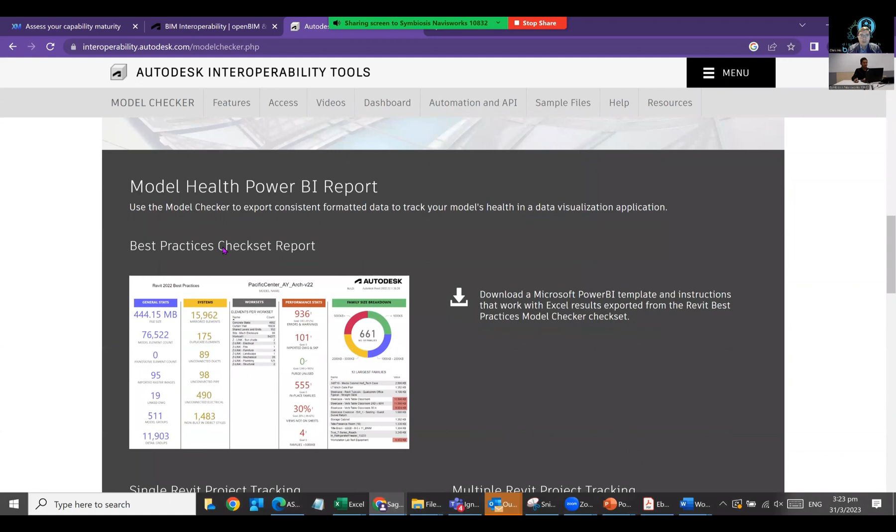Even on our YouTube channel you can look at it, but over here you can download sample XML sheets, Power BI templates that you can use, additional resources such as videos for BIM 360, and the Revit Model Health white paper. You can download these directly from this website, interoperability.autodesk.com. Then we have videos — on top you can see dashboards, automation and API, sample files. You can download some examples, like Penn State model checks, and other model set checks from here, plus helps and resources. All of this can be accessed through this website.

It's great — there are even sample files and PDFs to teach you how to check certain things on your model. Yes, absolutely. I myself came to know about this about 2 to 3 years ago, and we started implementing these quite regularly, and there is no additional cost. This is something people can immediately start acting on to make sure the data is standardized. As we move toward the cloud and common data environments, it's important that BIM acts as the foundation of your digital transformation. If the foundation data is correct and well hygiened, free of errors, then your upstream or downstream applications are more sanitized going forward.

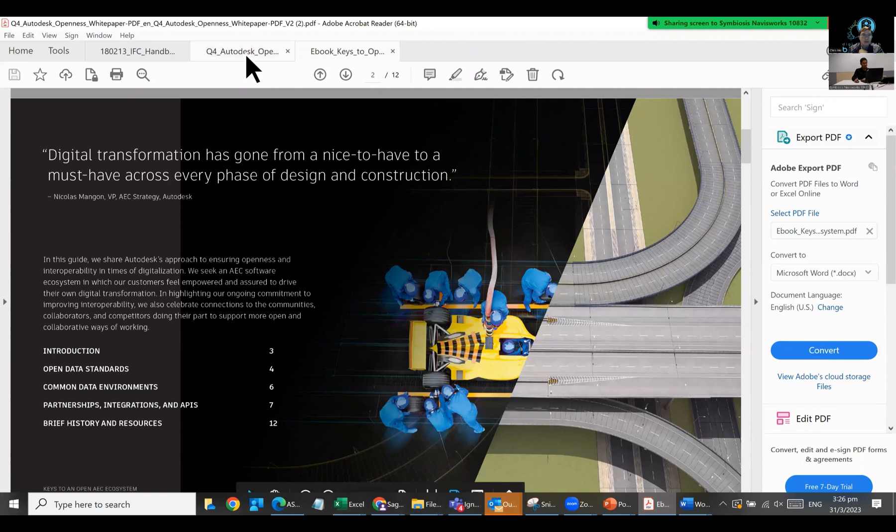Then here, Autodesk and IFC. It's a very interesting story, how IFC began the journey for Autodesk. So for example, if you see today, just sharing this slide with you, Autodesk was the founder of the International Alliance of Interoperability in 1994.

We co-founded it, right? Then in 2002, Revit was acquired, and we began developing the predecessor to IFC. Of course, Building Smart became international and established OpenBIM in 2005. Then Autodesk and Bentley signed the interoperability agreement in 2008. Then in 2010, we added STL exporters in Revit.

Then again in 2011, we opened it up as a toolkit for developers and so on. In 2013, we integrated the IFC standard into Autodesk 360 and BIM 360 cloud solutions. Today we call them Autodesk Construction Clouds, and we added the COBie extension inside Revit. In 2014, IFC 4 was released and integrated in Revit at that time. Going forward to 2021, today we are implementing IFC 4.3 for infrastructure.

So we have always been there, mostly the first ones to integrate and very tightly working with Building Smart. And also now we've joined the Open Design Alliance, by the way. Autodesk joined the Open Design Alliance in 2020. Building Smart is called the home of OpenBIM, and Open Design Alliance is what enables you to offer various SDKs and development tools.

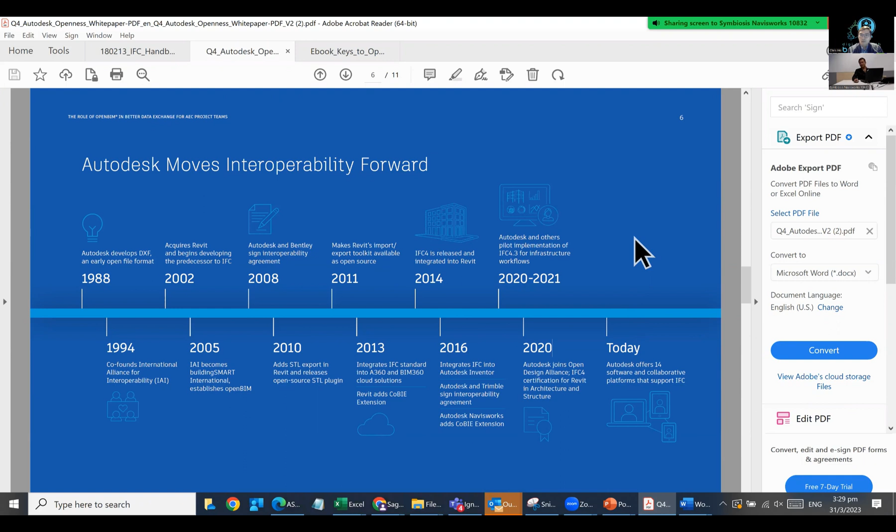And today we have more than 14 software products that have IFC integrated. These include software known by many people, including the Autodesk AutoCAD toolset, Civil 3D, which is our civil application for road and rail infrastructure, then Revit, Robot, Inventor, InfraWorks, Navisworks. All of these today support IFC.

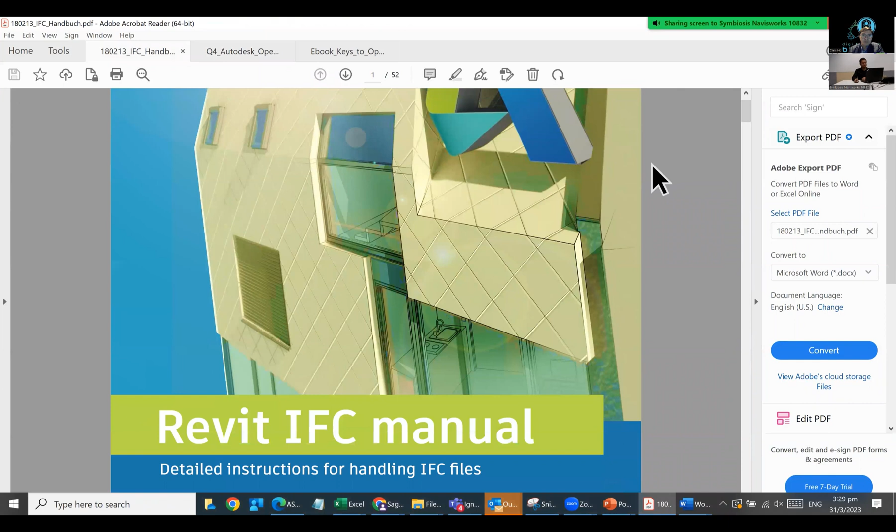So that is something where people can find information. And there is a handbook which we release almost every year, called the Revit IFC Manual. The Revit IFC Manual is quite a popular download amongst Revit users. It has detailed instructions of handling IFC files.

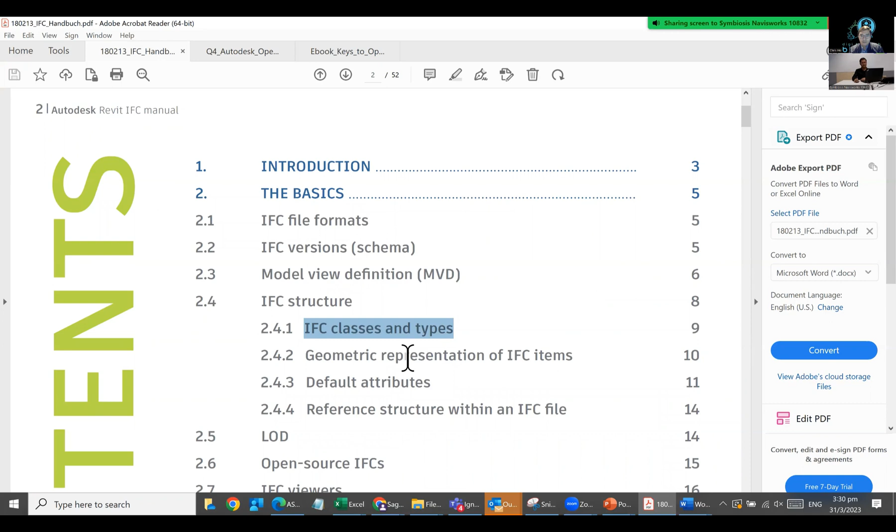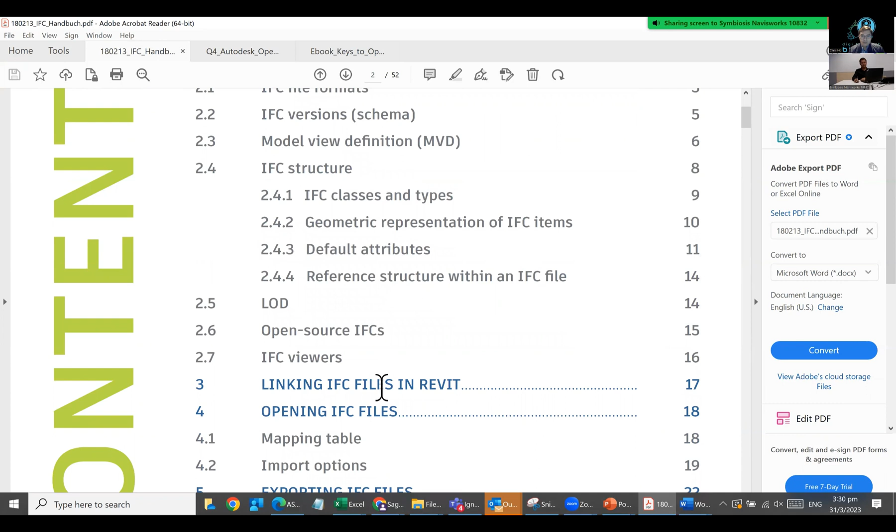So for example, we can look here. It gives you an understanding of what IFC is, IFC versions and schemas, model view definitions, IFC structure, IFC classes and types, geometric representation of IFC items, level of detail information, open source IFCs, IFC viewers, how to link IFC files in Revit, opening IFC files in Revit, accessing the mapping table, importing options. Everything that you need to know is in this guide.

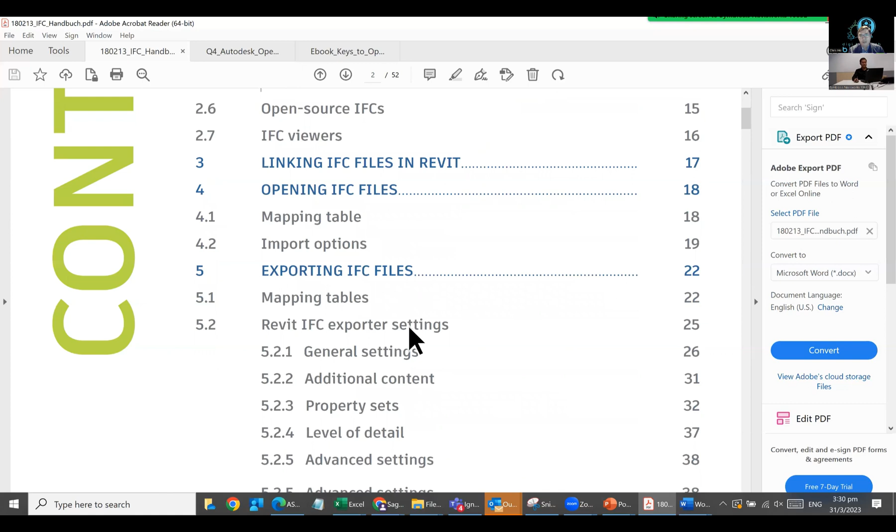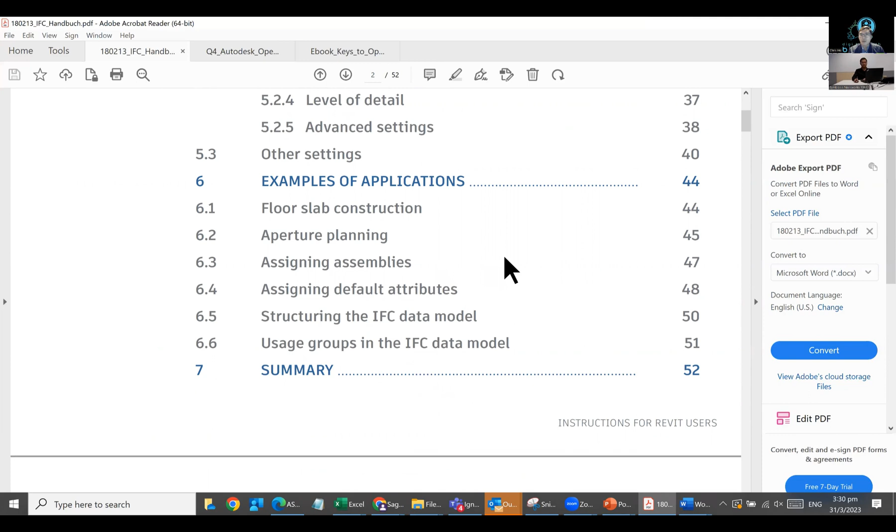All Revit users, roughly around 2 million odd users of Revit worldwide, can access this data, and it's freely available for everybody to use. All of this is very useful information, which I myself have been diving into for the last 6-7 years. There's plenty of IFC literature out there.

So thanks for sharing that with us. I think this will be very useful to anyone listening to this podcast later on, they can just go to the different titles of the ebooks and the PDF. Great resources, thanks for sharing this.

Just a very quick overview, since in terms of using software like Revit, how do you actually export a model onto IFC? Could you just briefly explain a bit on how you do that? Sure, of course. Exporting IFC from Revit is quite straightforward, and it will become even more easier going forward.

I could actually open up the Revit application, but let me just see if that can be done quickly. Okay, but the crucial thing to know is that Revit has been supporting IFC all the way since it was born, utilized by people since 2004, 2006. So the exporter always existed. I'll just share my screen again.

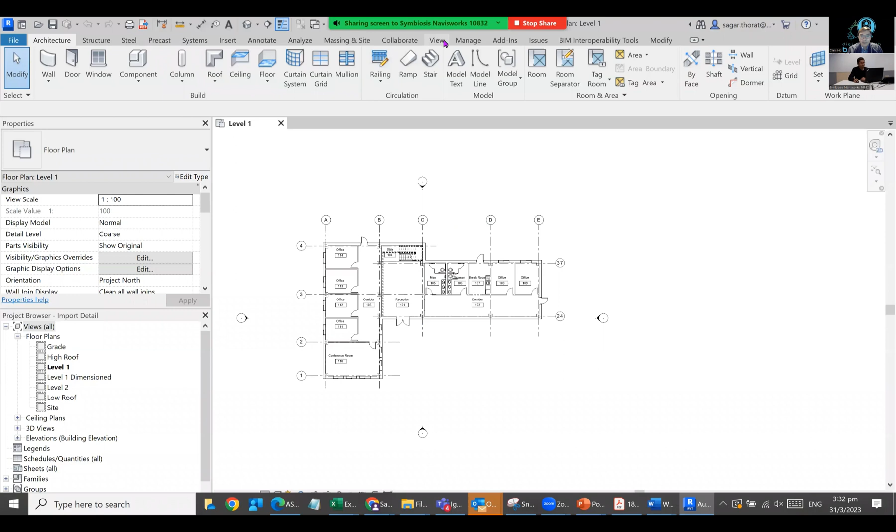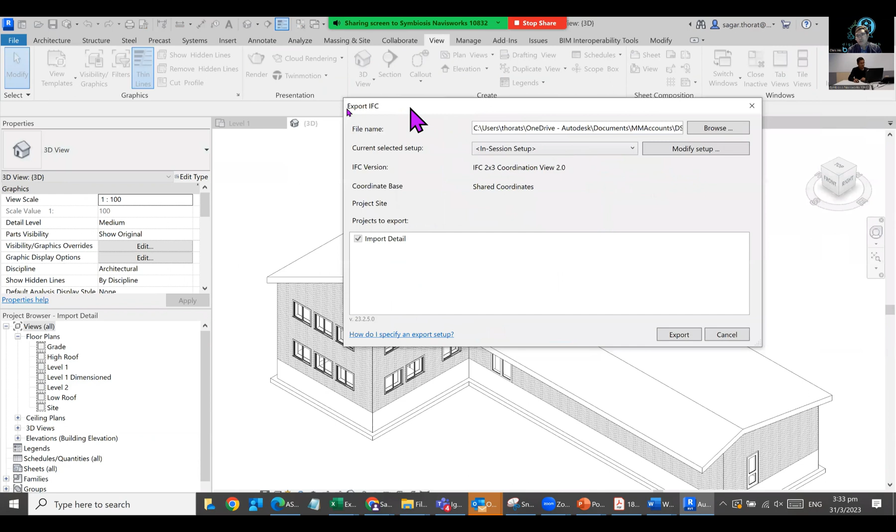Okay, I can see my screen, right? All right, so within Revit, you have this, you can go to File and you just export. So File, Export, and then you have an option here of exporting to IFC. When you export to IFC, the IFC export dialog box opens up. You can choose one of the setups here to export. The first setup to use is IFC 2x3 Coordination View. Then we have 2x3 FM Handover, Coordination View 2x2.

COBie is also a template here. Then IFC 4 reference view, IFC 4 reference view structural - these are the MVD definitions, the different MVDs. Then we have IFC 4 for building services, and the transfer view.

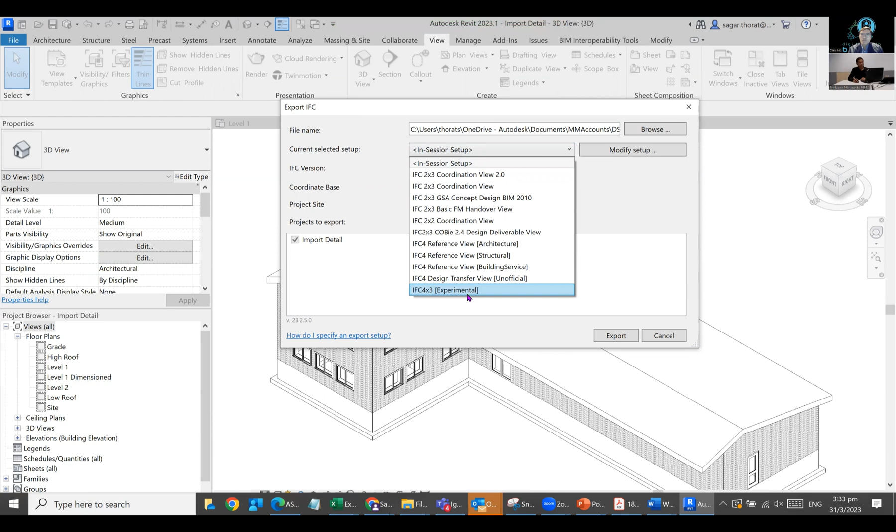And we have already launched, experimentally, an IFC 4.3 for infrastructure in there already. So if I want to do a design transfer view, I can actually modify the setup. People can actually create their own JSON files, their own export setups.

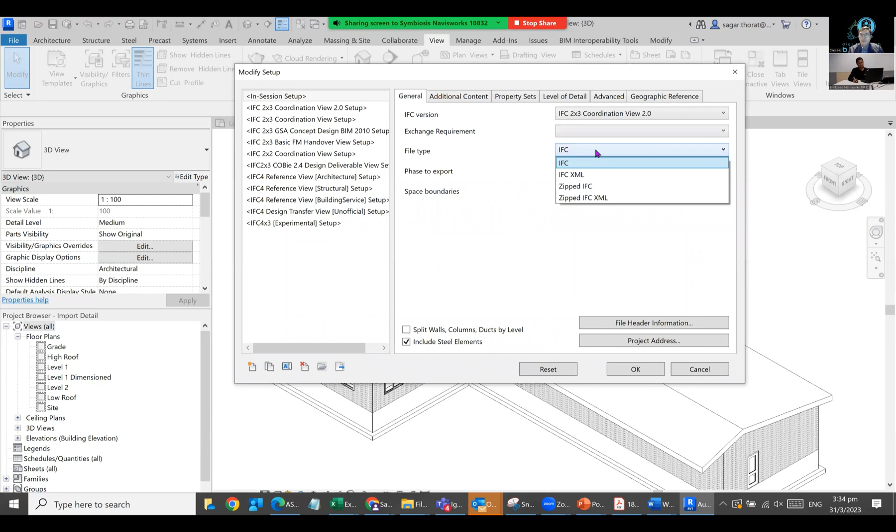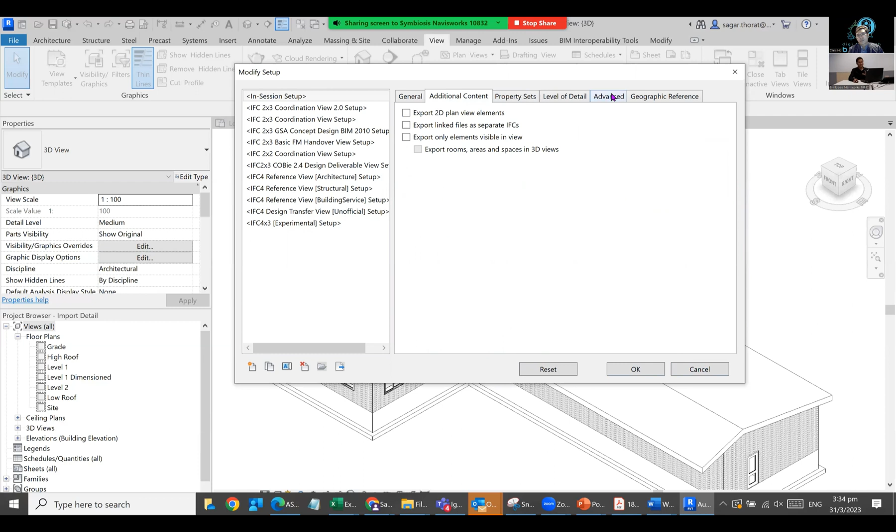You can base your export setups on the current IFC 4 or IFC 2x3, and start creating a new setup. I can just choose one of the base setups and choose the file type, either IFC XML or zip file. There are various settings where you can choose to export linked files as separate files, or from 2024 onwards it will export all of them together. So that's the basics of exporting IFC. More detail can be found inside the Revit manual.

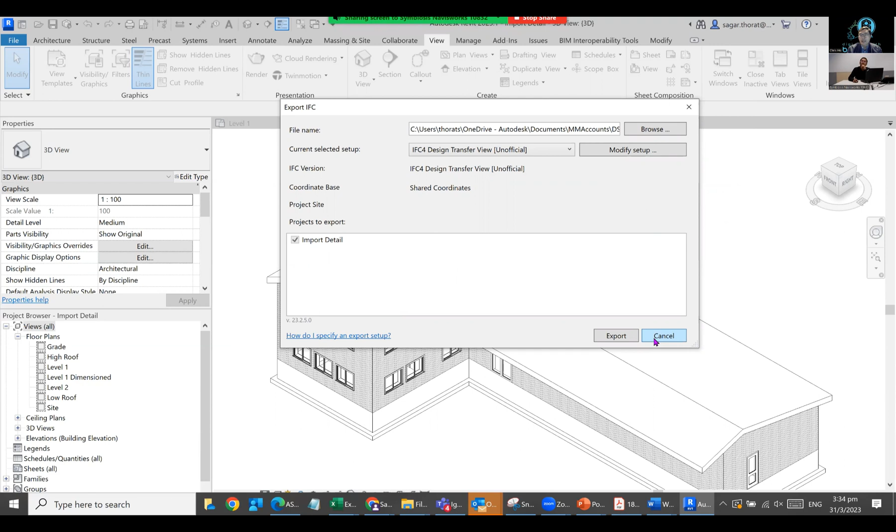Sometimes we need to export objects that might not necessarily be found in this classification, and we need to do it as user-defined objects. So can BIM interoperability help us with the user-defined condition? Yes, of course.

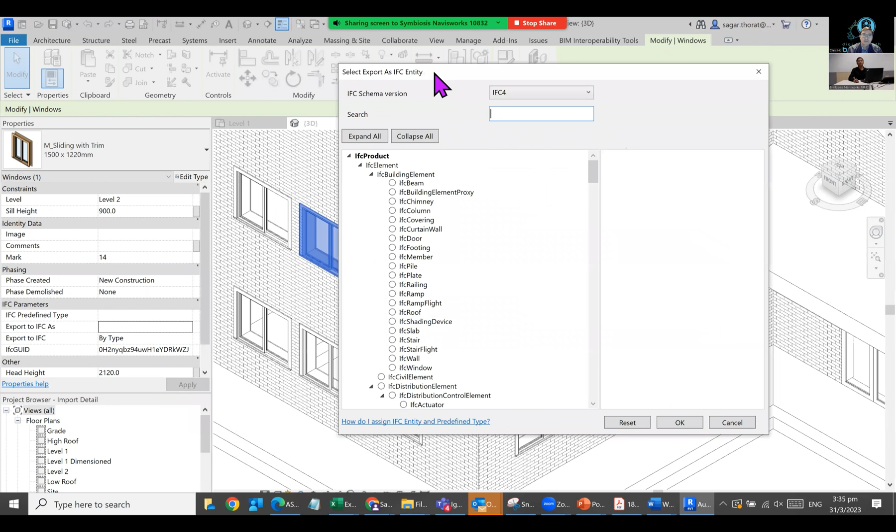First, in Revit 2023 you can already choose the IFC predefined type and export IFC as. If you want to export IFC as, you can export directly from here using a predefined type. So let's say in this case I'm choosing a window, so I can choose IFC window, and choose what kind of window it is right here.

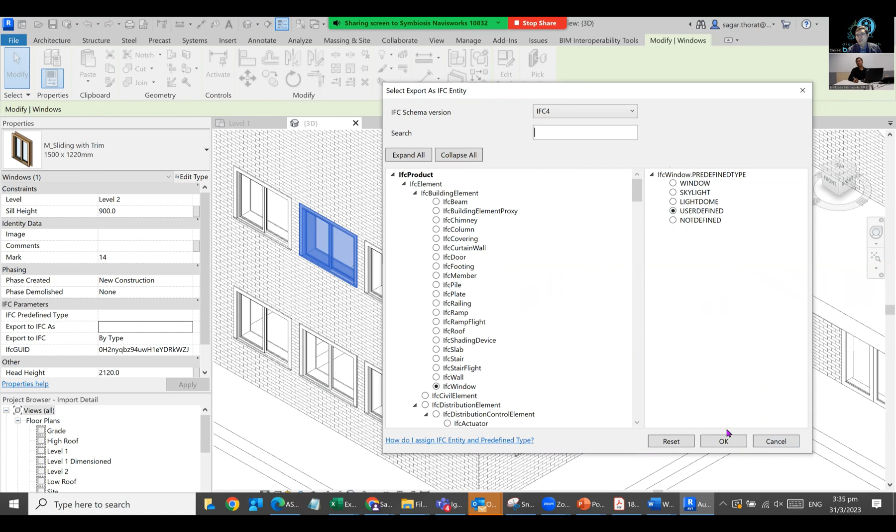And if I want to create a user-defined parameter, I can just say user-defined here. This is directly inside Revit itself. This Revit version is 2023, if I'm not wrong. Am I correct? Yes, this is 2023. And currently 2022 doesn't have this function, right? No.

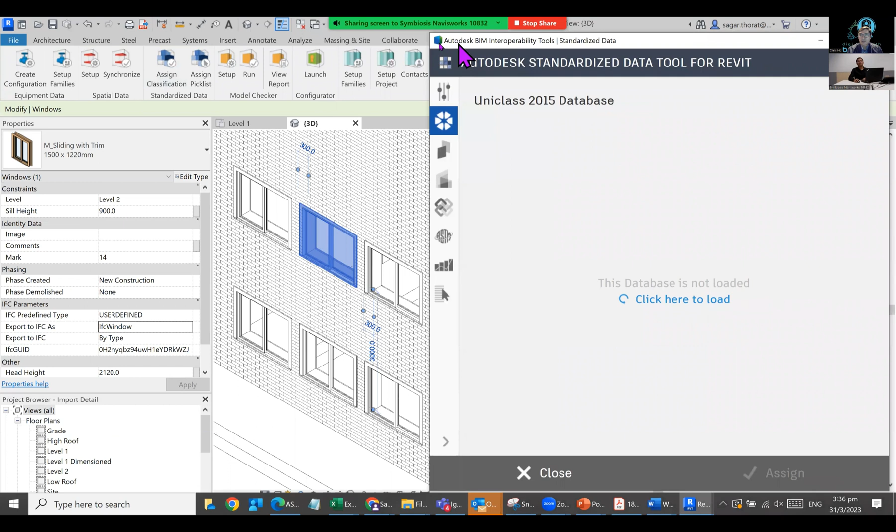So for those users, they can use BIM interoperability tools. I have this installed. Here you have the classification manager. You go to assign classification, and in there, the default, you can go to IFC here, and load your IFC setup. Now if I choose window, it automatically filters by window.

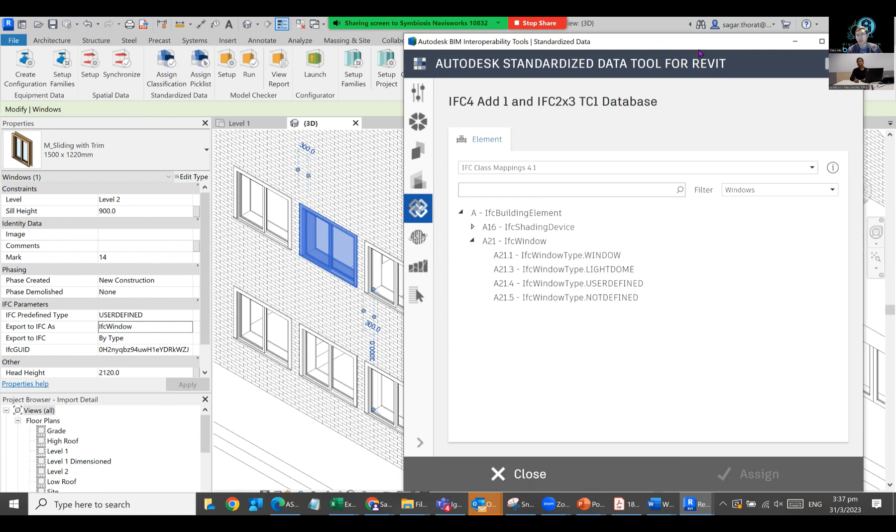Then over here I can just choose from a drop down what kind of window it is, and here I can choose the same. So the same functionality can be used all the way from 2020 up to 2023 using the BIM interoperability tools. For 2023 I can just use the direct function, user-defined is already built in, whereas for earlier versions I have to use the interoperability tool to do the user-defined.

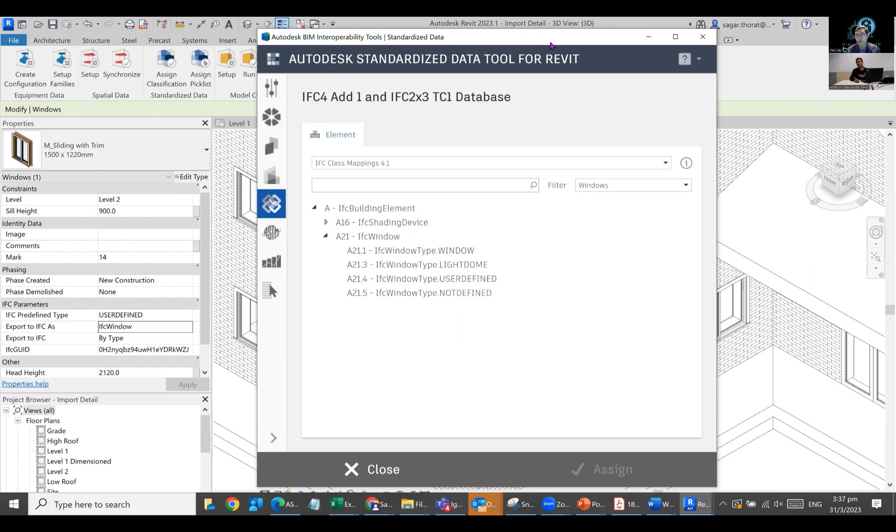Correct. And we are maintaining the BIM interoperability tools with the current version minus 3, which means every user in the last 4 versions is always able to do this. That's good to know.

Just now you talked about JSON files, and about creating shared parameters. These are some of the ways that you can populate it as an IFC parameter in the properties in order to do certain assignment to whatever objects you create. But are there other methods besides keying it manually or importing JSON files? Can you actually do it via using Dynamo?

Computational software like Dynamo to help you do the mapping automatically - is it possible to do it that way as well?

So yes, the answer of course is yes, because Dynamo, as you know, is a computational design and data tool, and it works directly inside Revit. So your parameters are just an Excel file, or an XML data file, and as long as we can read it inside Dynamo, you can populate it and assign it to particular objects. You can define the readability through the Dynamo and Revit engine itself. So that's very much possible.

And the biggest advantage there is that you can do a lot of customization yourself. So companies who are well advanced in their BIM maturity, like level 3 or level 4, normally use Dynamo quite a lot to really play around with data, parameters and properties.

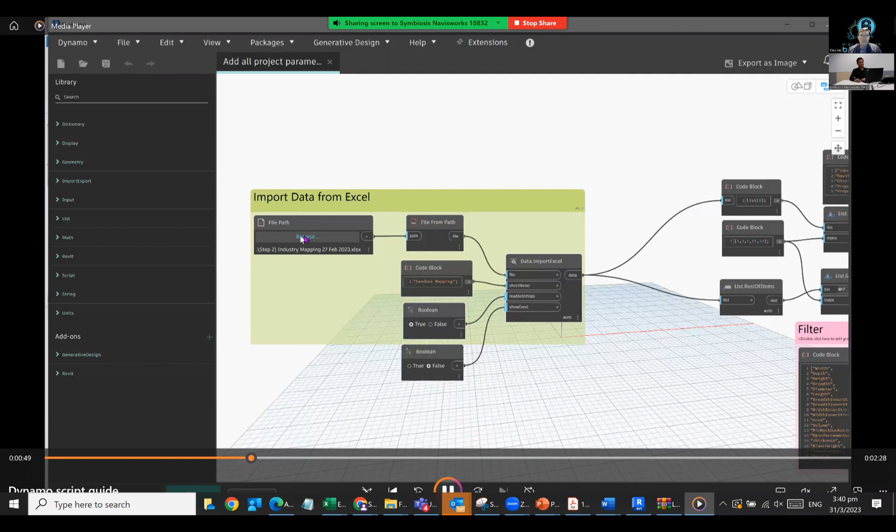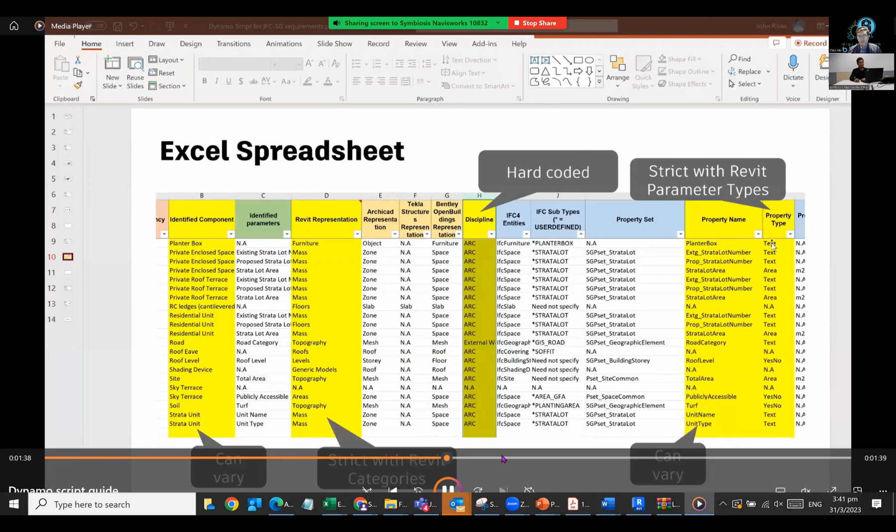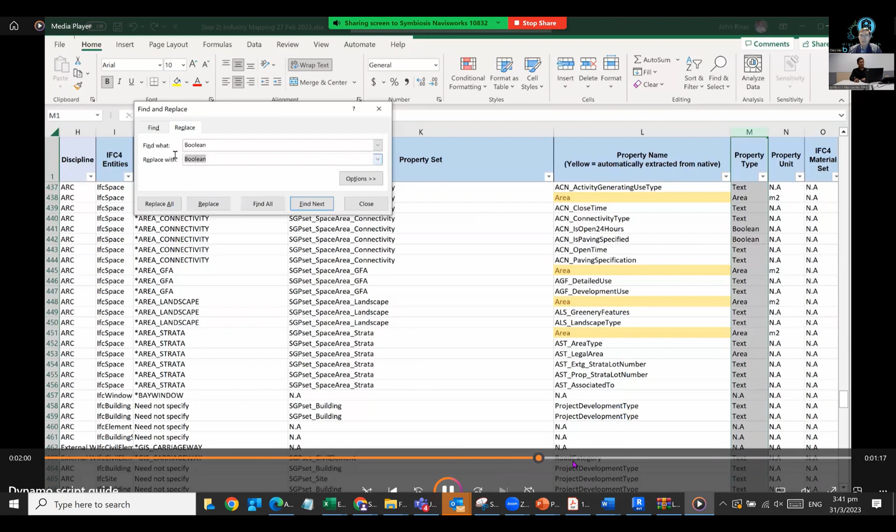So this Excel sheet could be simple, where you have the component name, Revit representation, any other representations. Once you have these parameters and property sets mapped up, you can straight away do modifications such as yes and no parameters, Boolean parameters. These kinds of things, like filtering of parameters, can be done, and then you see the parameters directly pop up over here as a code block.

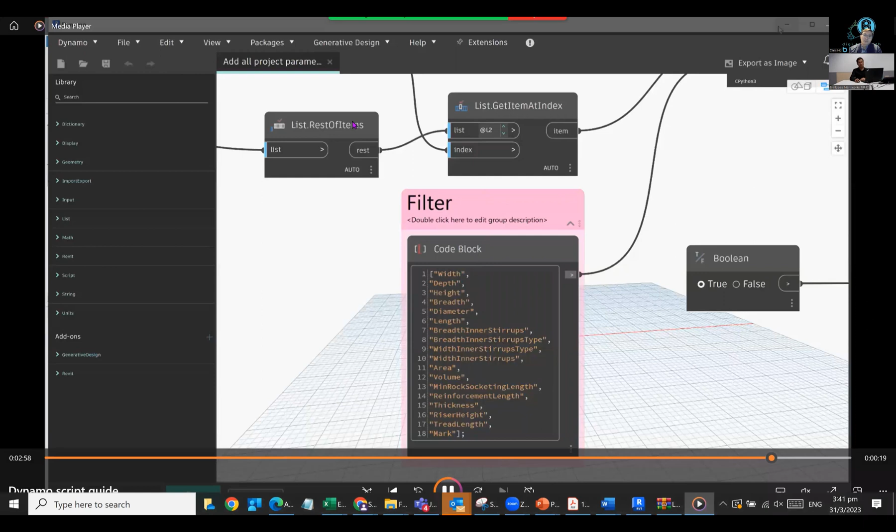And then from here, you can push the parameters directly. You can even split them based on discipline, like architectural parameters, structural parameters, MEP parameters. So these kinds of things you can customize and do inside Dynamo straight away to populate IFC parameters. Once you're done, you can see in your properties bar that the parameters will be populated. For example, in this case for the wall, we populated construction method and fire rating as a custom parameter.

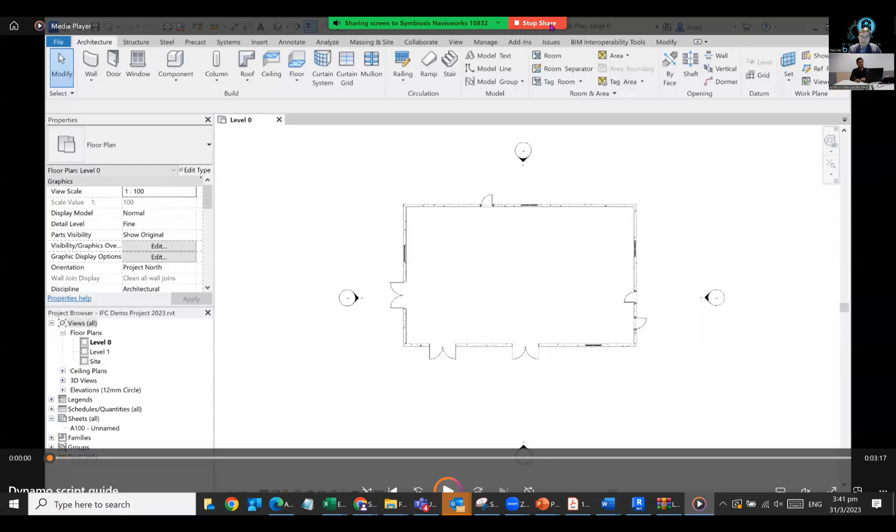It's great to know that there's also other methods to do a mapping. Yes, and for people who are keen to know more, they can go on dynamobim.org and on GitHub, where they can find some sample scripts to run, and sample Excel data that they can pull inside as IFC parameters.

Okay, that's great. Now, you mentioned earlier on when we first started, IFC and OpenBIM is not a new thing, but it has been on. There's a lot of activity now going on with OpenBIM, and I'm pretty sure the industry is working towards the maturity of using OpenBIM to do coordination, using IFC to do data exchanges. So in the future, I think we are going to experience a new generation of BIM users that are going to be very well versed in this area.

So what are the benefits you'll see for this group of BIM users that will be using IFC on a daily basis? Eventually, it's going to be a daily basis. I will see that, yes, absolutely. And this is already happening, and today we probably do not have a lot of traction, people don't know a lot, but it's growing and it can significantly explode going forward.